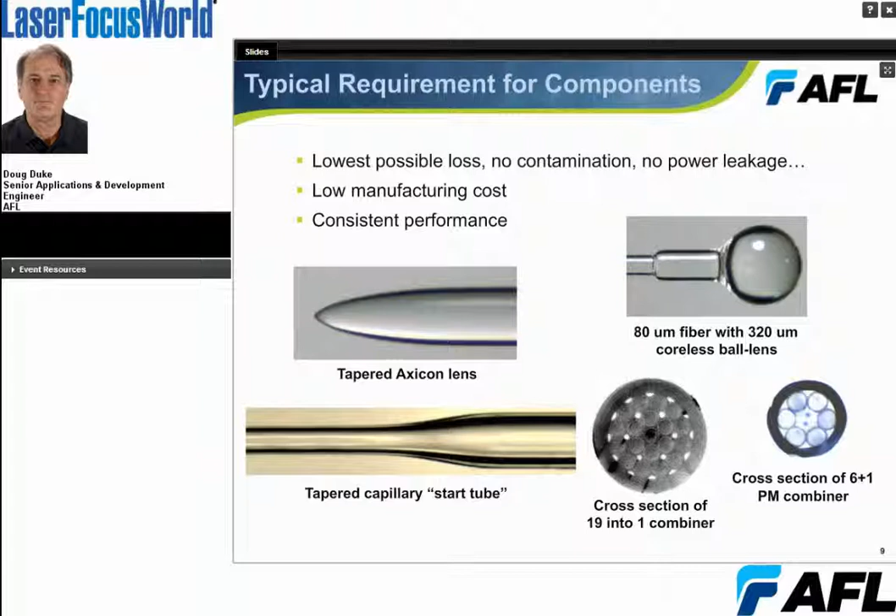So you can see a cross section of a 19-into-1 combiner that would combine the outputs from 19 individual pump lasers. And then there's also a cross section of a 6+1 pump combiner where there's a polarization maintaining fiber in the center and 6 fibers from individual pump lasers surrounding that. So these are some of the typical things that have to be created and put together to create a fiber laser.

One of the things about the active fiber is it's almost always going to be what's referred to as a double clad. So there's an inner core, which becomes the lasing cavity. That's surrounded by an inner cladding where the pump power is initially dumped. And then there's an outer cladding, which in the case of the fiber we see here is a low-index polymer, and so that low-index polymer helps contain the pump power within that cladding.

One of the critical things about splicing this fiber is that you want to do as little damage to the inner cladding as possible. You want a very smooth, debris-free surface, because if there are any crack sites, debris, or contamination on the fiber surface, after splicing this fiber, those damaged sites on the surface of the cladding will be sites where the pump power can escape. And in a worst-case scenario, after we recoat with the low-index polymer, it could literally catch on fire if you have enough pump power escaping. So it's very important to splice with very, very good quality to have a very smooth surface that's contamination-free.

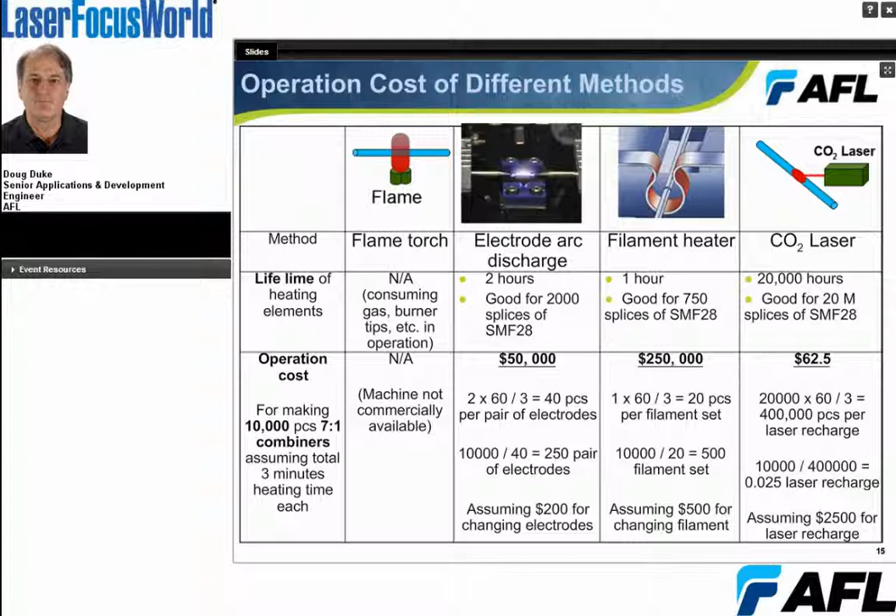So those are kind of the trade-offs. Let's talk a little bit more in detail about a filament. So here you can see a diagram or a picture of a filament. You can see the fiber going through it. So again, it's a resistive element. So like a filament in a light bulb, it needs an inert gas environment to protect the filament from ablation. There will be some ablation of the filament over time in any case.

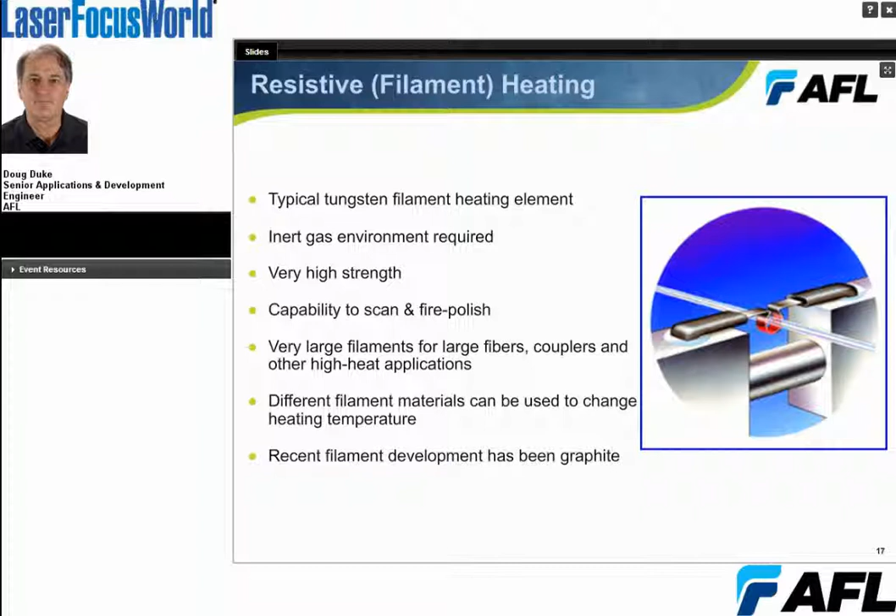It can be scaled for larger fibers by changing the shape or size of the filament, and you can change materials as well to change heating characteristics. So it can be versatile and adaptable. One of the things about the resistive element or a filament is that the heating element surrounds the fiber, and that means that you have to do the alignment using your camera or other means. You can observe at one point, but then you have to move it over to where the filament is to heat it.

So if we talk about some of the advantages of the filament, it's scalable, adaptable, capable of high strength, and during its useful life, filament is relatively stable, and you can maintain your process control fairly well.

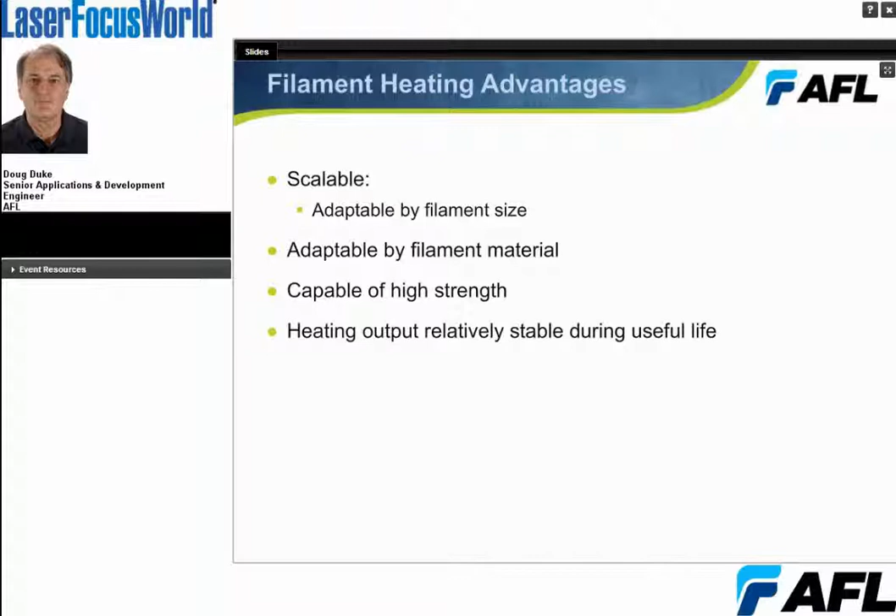Some of the downsides are the fact that you do have to change the filament based on application, and if you're doing tapering, especially of a capillary tube, the filament shape is such to heat the capillary tube evenly all the way around, you have to feed it through the side of the filament. That makes loading the capillary tube difficult. Filament replacement also requires alignment, and that can be tedious and time-consuming. So you've got a life-limited filament, relatively high replacement cost compared to electrodes, and a little bit more work to replace the filament than you do with electrodes.

Filaments are a little bit unforgiving. If you apply too much power and overheat and stress the filament, you pretty much have to replace it. You need to keep it within the acceptable process limits for the type of filament you're using. The inert gas is critical, and you typically have to have it very close to the filament location. It can't be remote, so it has to move with the machine. The operator has to be careful when loading and unloading a fiber because the opening at the top of the filament is relatively narrow, and if you touch the fiber against the filament, you could damage it.

And as we mentioned before, it's not really compatible with imaging at the point where you're heating the fiber, so you can't use warm imaging. Also, as we mentioned before, there are issues with the filament ablation and deposits on the glass surface. So this has been a problem for some of the users who are using this system for assembling fiber lasers.

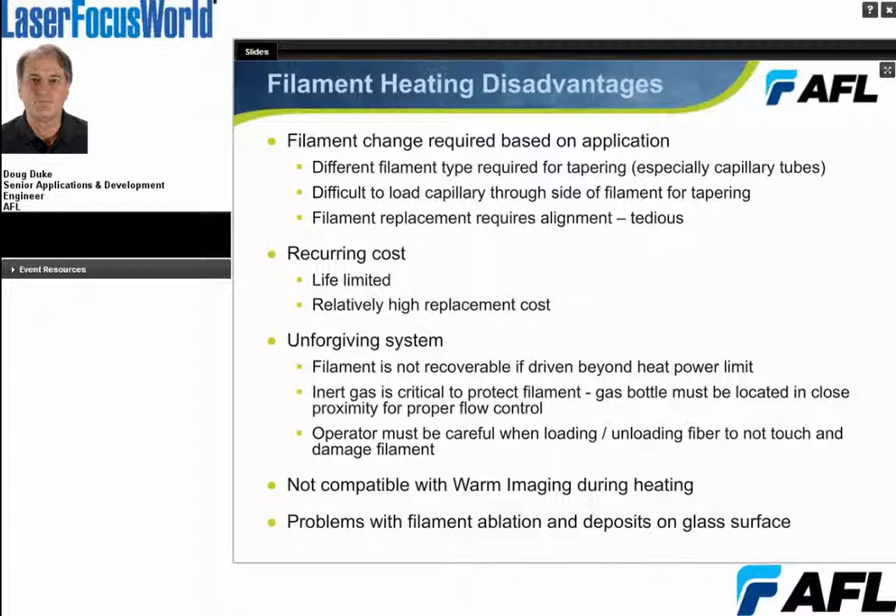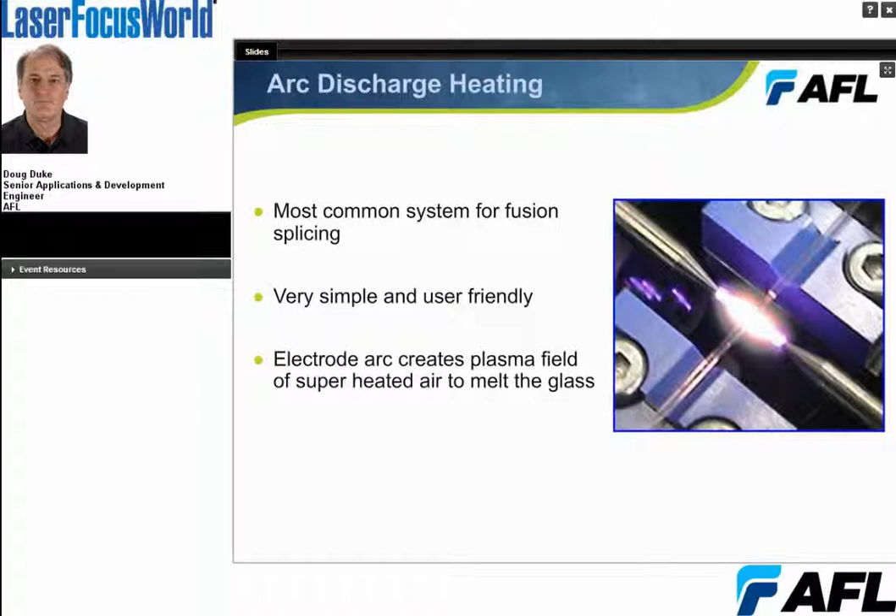Arc discharge systems, very, very common, very simple, easy to use. Essentially, the two electrodes create a plasma field of superheated air, and that's what melts the glass. It can also be scaled somewhat similar to filaments, but in order to scale it for a larger fiber, you need to increase the size of the plasma field, and we can do that by increasing the gap between the tips of the electrodes.

One thing that should be borne in mind about an electric arc system is that the path between the anode and the cathode doesn't go directly through the fiber. It's going to go either over or below the fiber. So as you can see in the photograph here, you're going to get some differential heating with this method. Now, for smaller fiber diameters, that's meaningless, but when you get up above about 500 microns, the differential heating, where you're heating the fibers more on the top than at the bottom, can become a problem. We'll talk more about that later.

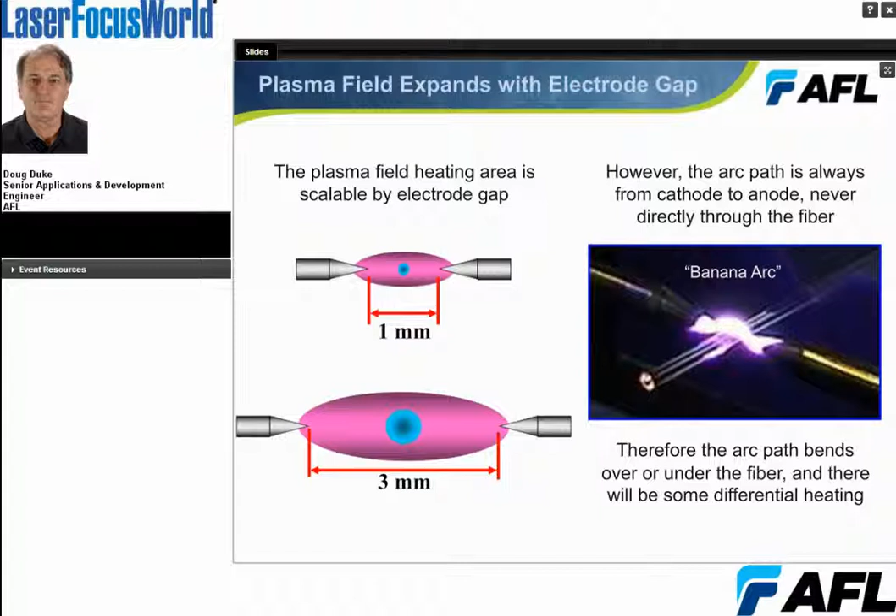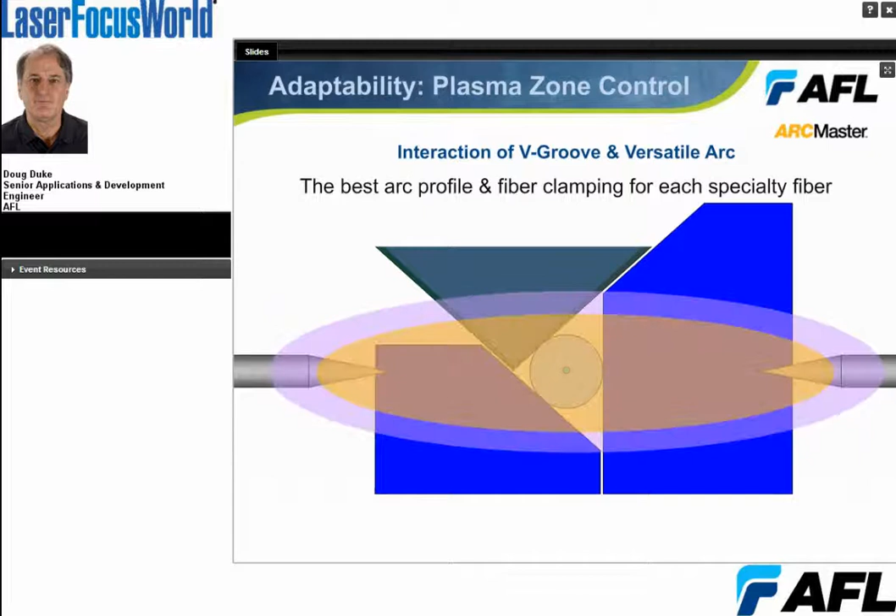As we mentioned before, it's very adaptable. So, for example, if we're splicing an 80-micron fiber, we might offset the fiber vertically from the axis of the electrode so that we're in a relatively cool area of the plasma field. Whereas for a normal fiber, we might line the electrodes up with the axis of the fiber so it's in the center and the hottest part of the heating zone. And then when we get to a larger diameter, we might increase the gap between the electrodes so we've got a wider plasma field that more effectively heats a large diameter fiber. So again, it can be an adaptable system.

One of the problems, or one of the things that's just in the nature of electrodes, is that there will be deposits of vaporized silica from the glass fiber that build up on the tips of the electrodes. This is not something you can avoid.

In fact, initially, when you put a new pair of electrodes in, you want to do kind of a burn-in on the electrodes so that you build up an initial deposit of silica so that the electrode heat output will be stable. So you go through a stabilization before you start doing anything critical. The silica deposits become less stable after about 500 arcs in the case of normal splicing. But the deposition of the silica becomes much, much worse when we use higher power and larger fiber diameters.

One of the other considerations is conducting heat away from the tip of the electrode. So as we go to larger diameter fibers, we go to larger diameter electrodes that can more efficiently conduct the heat away, and we might also use heat sinks to pull the heat off of the electrode itself.

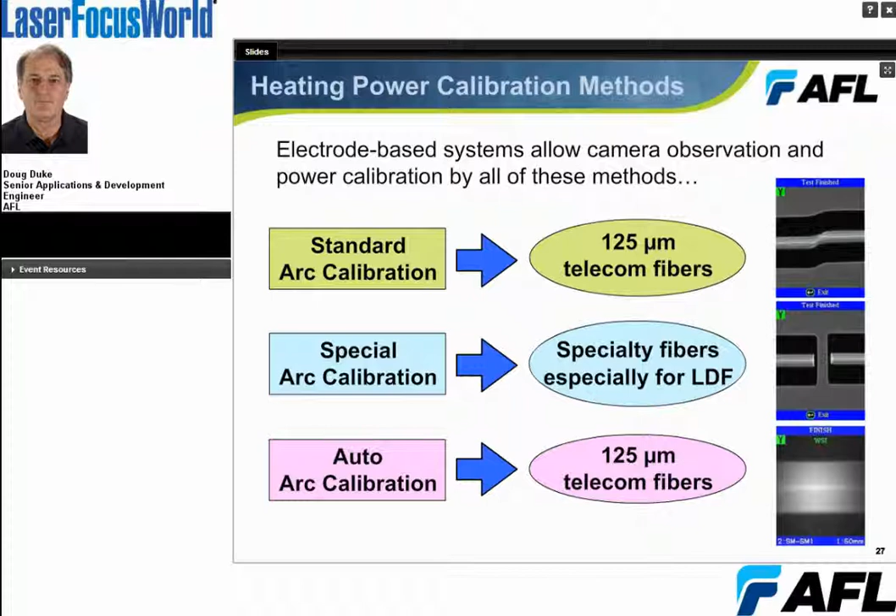So one of the good things about an electrode system is it's compatible with all these methods of maintaining the proper heat output. So some of the advantages: robust, forgiving for production, well-proven, reliable, easy to use, user-friendly, adaptable, compatible with methods of calibration. The electrodes are inexpensive and they're very easy to replace.

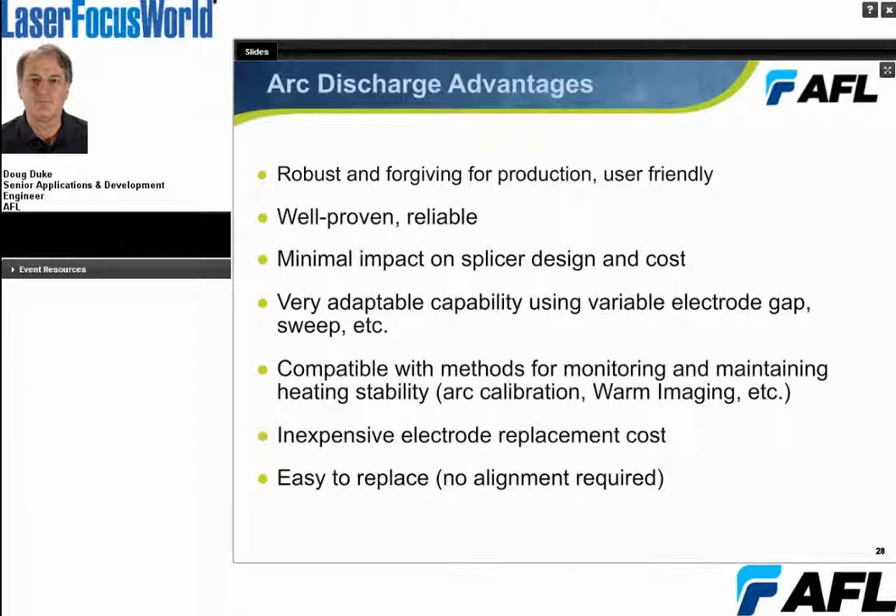But some disadvantages are the electrode. If you change the gap between the electrodes, you need to recalibrate. The electrode life depends on the application. Silica deposits become more severe as we go to higher power and larger diameters, and you will get some deposits on the fiber that will cause some damage or contamination to the fiber surface, although typically not as severe as what you might encounter with a filament system.

There is some instability splice by splice due to the fact that the silica deposits change a little bit, so routine calibration is recommended. And you do have differential heating top to bottom because the plasma field is either curving over or under the fiber.

Multi-electrode systems have also been used. Here you can see some schematics of some different systems. AFL has done quite a bit of testing with multiple electrode systems. Here you can see a 4-electrode and a 3-electrode system. These are all in the same plane, which means that the plasma field is expanded in one plane only. So this is a way of overcoming the problem of the banana arc that's going to differentially heat the fiber top to bottom. So that can be useful.

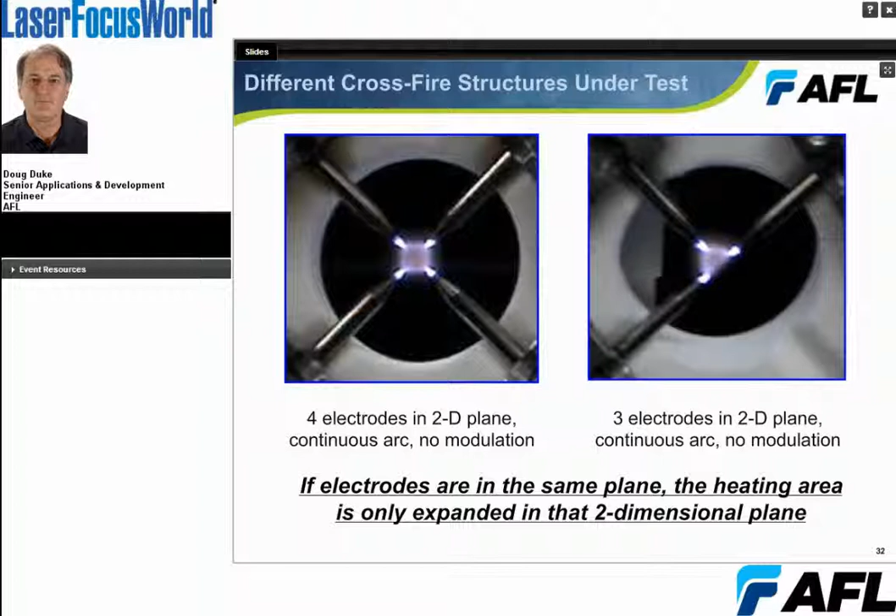If the electrodes are coplanar, again, we are expanding the heating area in the plane of the electrodes relative to the 2-electrode system. So that allows us to splice larger fibers, to in fact taper or splice fibers of 2 millimeters or more, which you really can't do with a 2-electrode system.

So the multi-electrode system has some advantages over dual electrodes in terms of allowing us to get to larger diameters and being better for tapering and more uniform heating. And it shares some of the user-friendliness of electrode systems in general.

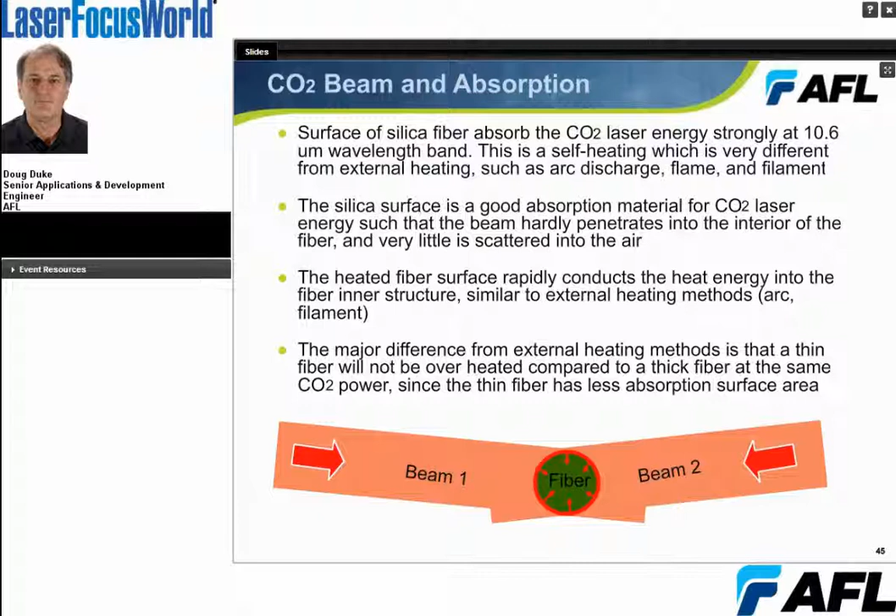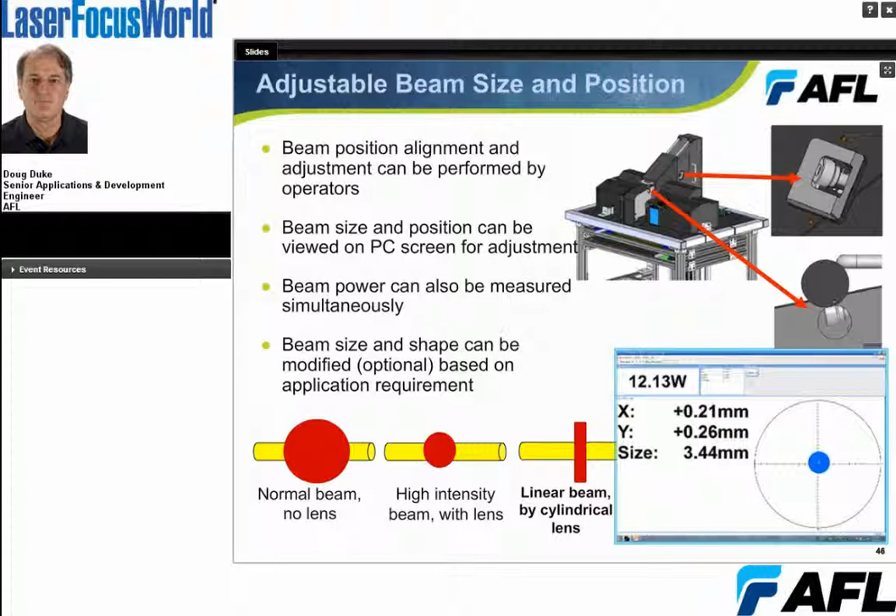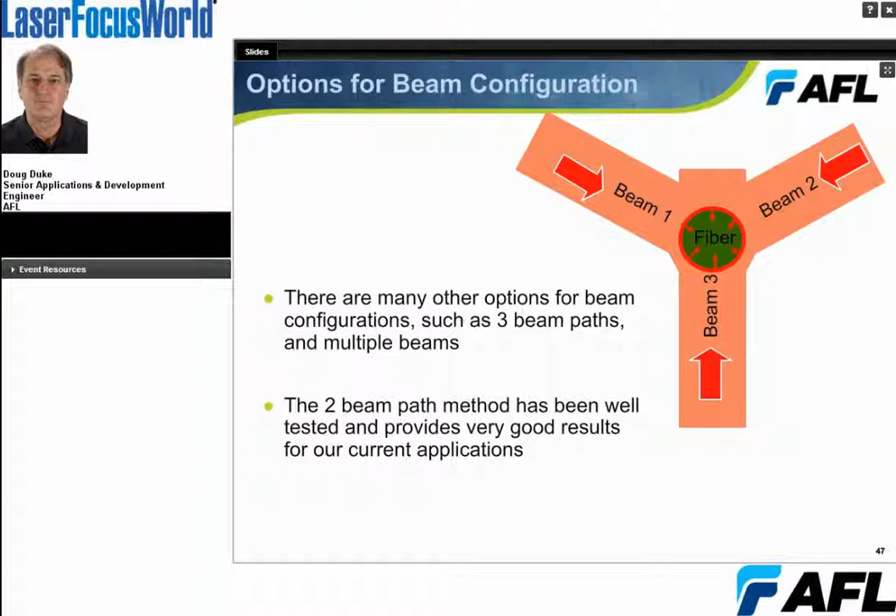Now, we can control the size and the position of the heating area by changing the shape of the beam with lens elements. So we can have a normal Gaussian beam. We can intensify it with a focusing element. We can use a cylindrical lens to make more of a linear heating area. There's various things we can do to control the shape and density of the laser beam. And we can direct the beam in from three axes if we need to. We're actually testing a system like this in our engineering group as we speak. So we believe there's some significant advantage for high-powered fiber lasers for using the CO2 laser.

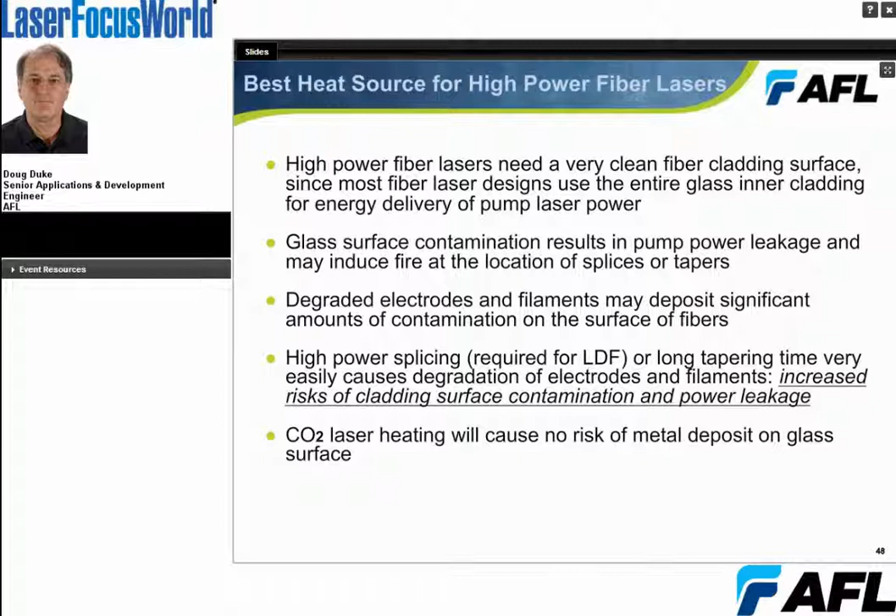Again, as I mentioned before, one of the issues with these double-clad fibers is to make sure that we have a very smooth, debris-free surface of the cladding, and with the CO2 laser, we don't have any source of contamination from the heating source. So we're really limiting the deposition on the fiber surface very significantly. And that also plays out in terms of a benefit in terms of fiber strength. If we're not contaminating or getting debris on the fiber surface, then we don't have crack sites that weaken the fiber to as great a degree.

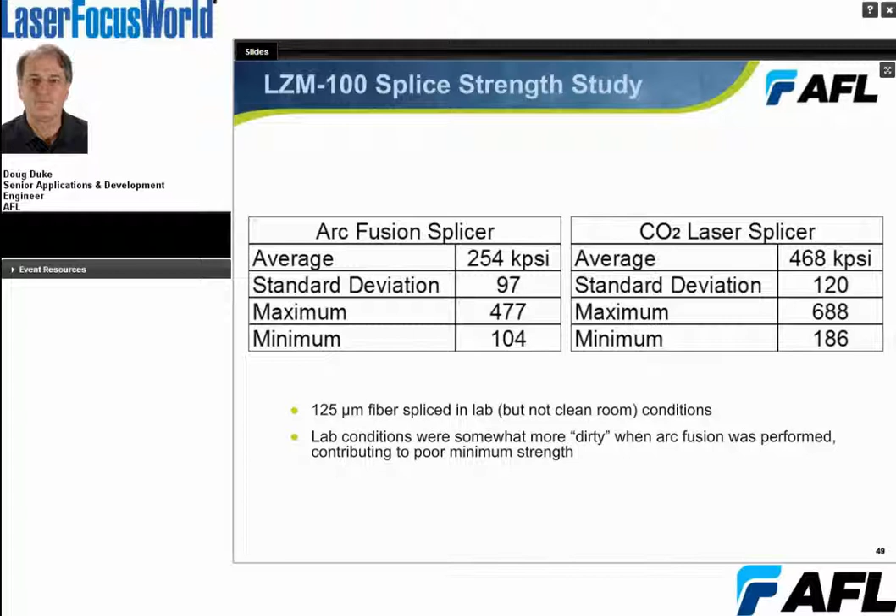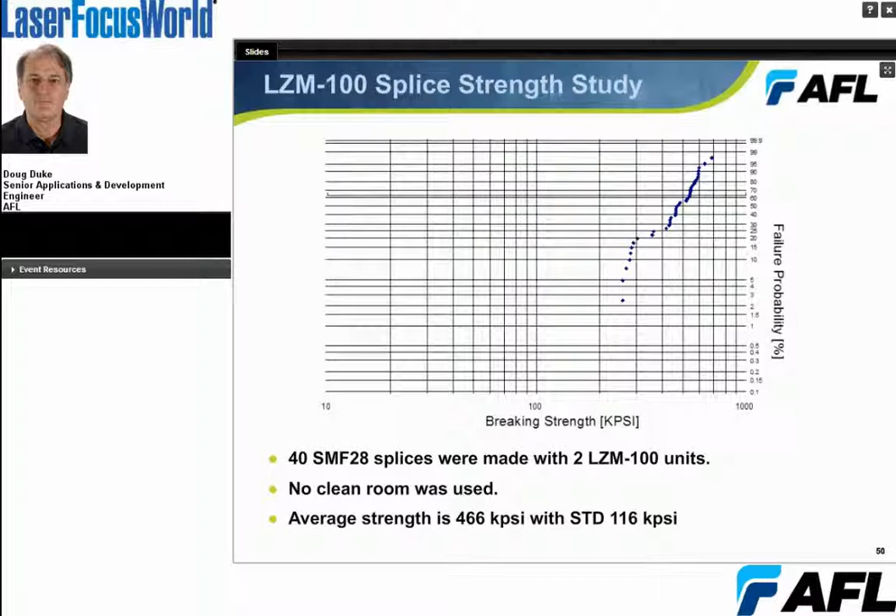So here you can see, comparing the CO2 laser splicer to an arc fusion splicer, significant benefits in terms of the strength. So there are analogous benefits in terms of being able to contain a lot of pump power for a high-energy fiber laser. This is just similar data plotted in the form of a Weibull plot. All of this data that we've shown is just normal laboratory data. It wasn't conducted in a clean room. We could get much better results if we used a laminar flow bench or a clean room.

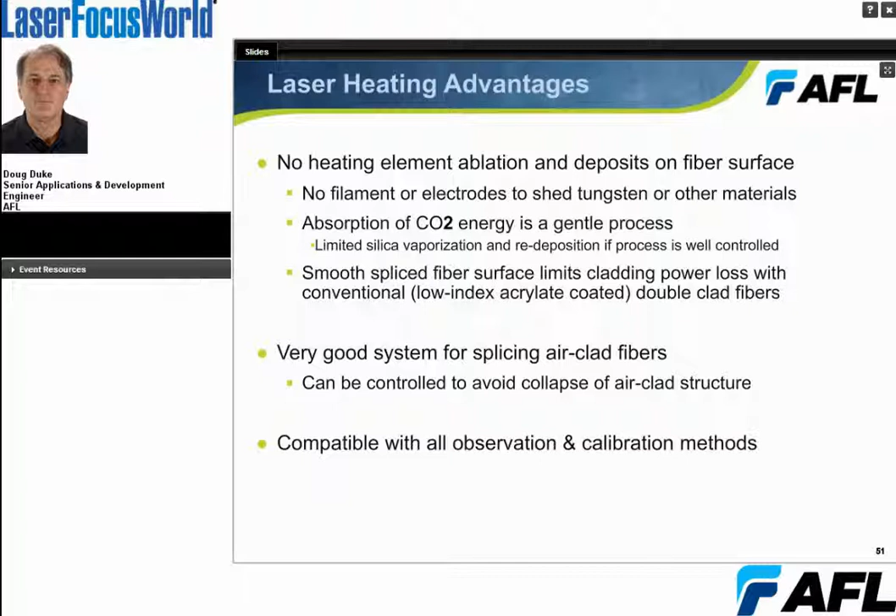So some of the advantages of the laser: there's no heating element to have ablation or cause deposits on the fiber surface. The CO2 absorption is a relatively gentle process, so if we control and use just the right amount of heating, we're also limiting the amount of vaporization of the silica itself and the redeposition of silica onto the adjacent areas of the fiber. So we're going to limit our cladding power loss in terms of fiber laser applications. It also turns out that this method of heating is very good for air-clad fibers. We can control it very well so that we avoid the collapse of the air-clad structure. And the laser system is compatible with all observation and calibration methods.

Disadvantages, probably the biggest one is, well, let me finish up with the advantages. Essentially, we have almost no recurring consumable costs. The laser itself will typically have a life of about 20,000 hours, at which point you send the laser in and get it recharged, and then you can use it again. So every couple of years you might have to do that, perhaps every 5 years. So you've really got reduced maintenance downtime. There's no need to replace electrodes or filaments, no need to recalibrate after replacing the filament or electrodes, no need to align the filaments or stabilize new electrodes.

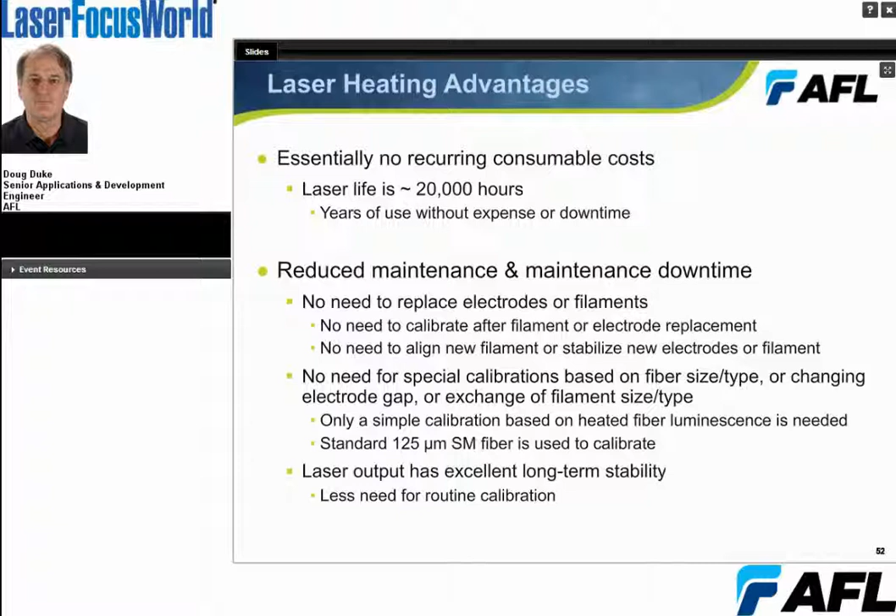There's no need for calibrations based on changing the size of the fiber or changing electrode gap or changing filament type. All of those things are avoided. And the laser output itself has excellent long-term stability. So there's just, in general, less maintenance and calibration downtime.

There are some disadvantages. The initial cost of a laser is quite a bit more expensive than other heating systems, including the beam delivery optics. There are safety issues to be addressed, so you have to take care of that. It's large and bulky, so there's service and support issues that have to be considered. And there's also a short-term power instability that has to be addressed, and we'll discuss these details.

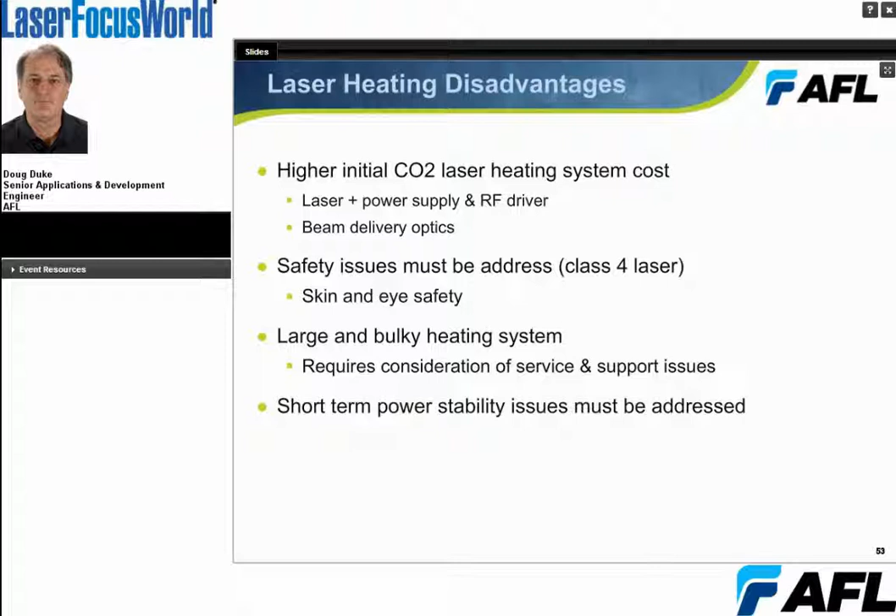So let's talk about the power instability. A CO2 laser typically has a power fluctuation of about plus or minus 5%. When you initially turn the laser on, the fluctuation is very rapid, and then it continues to fluctuate at a slower pace as the lasing cavity warms up. But this power fluctuation is due to the expansion and contraction of the lasing cavity and resultant mode hopping.

So how do we do that? Well, we use two feedback methods. One is that we can split off with a beam sampler a small amount of the output power of the laser and monitor that directly and use that for feedback. And so that's quite useful. But the other thing we can do is we know that the brightness of the fiber depends on the energy being absorbed by the fiber, so we can use the luminescence of the fiber as detected by the observation system, the camera of the glass processing and splicing machine, as a feedback method.

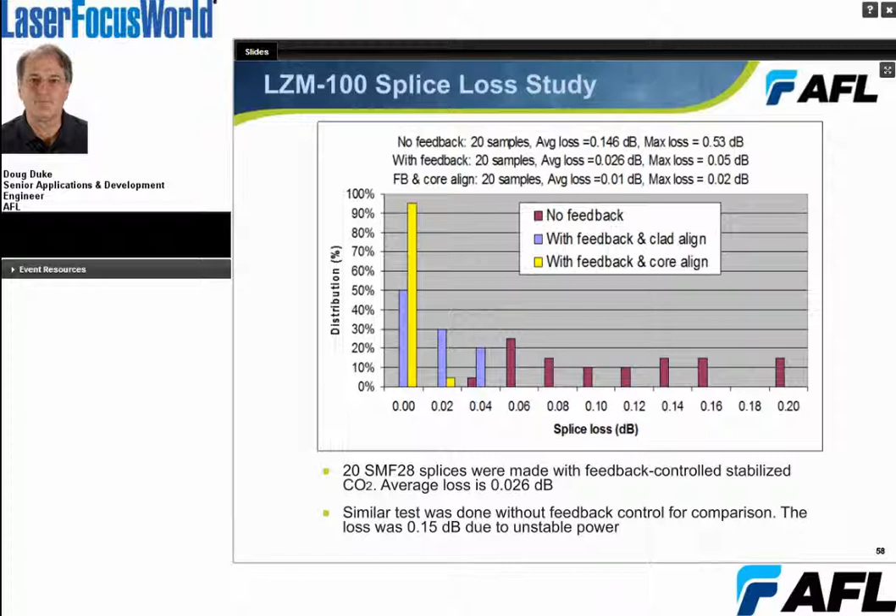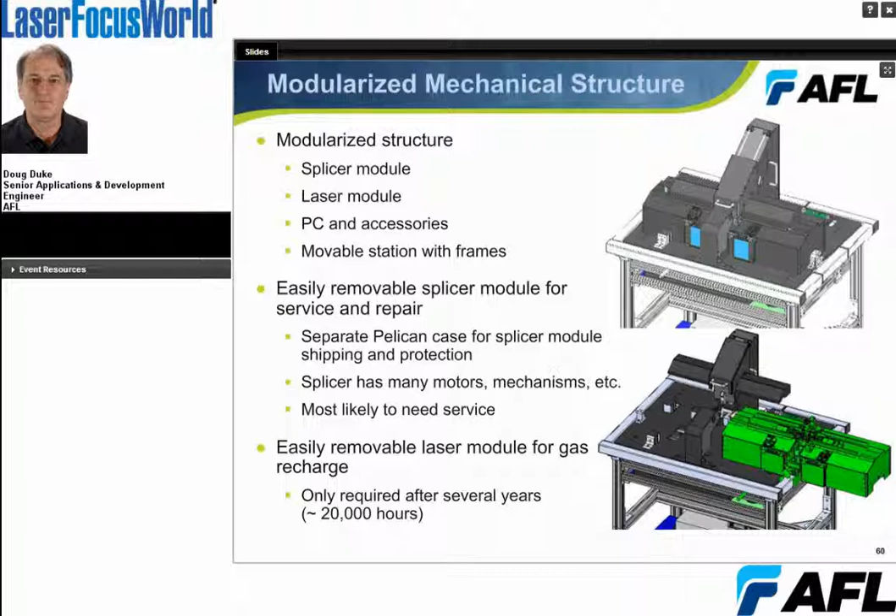So these are the kinds of considerations you need to be thinking about if you're going to design a laser-based glass processing system, because overall it's quite bulky, and you don't want to have to put the whole thing in a crate and send it in for service. The other thing is safety. The CO2 laser itself is a Class 4 device, which means that it is hazardous in terms of both skin exposure and eye exposure. So you need to enclose the working area and use safety lockout switches to make sure that during operation the operator is not exposed to any of the laser energy. So that has to be a design consideration for a laser-based system.

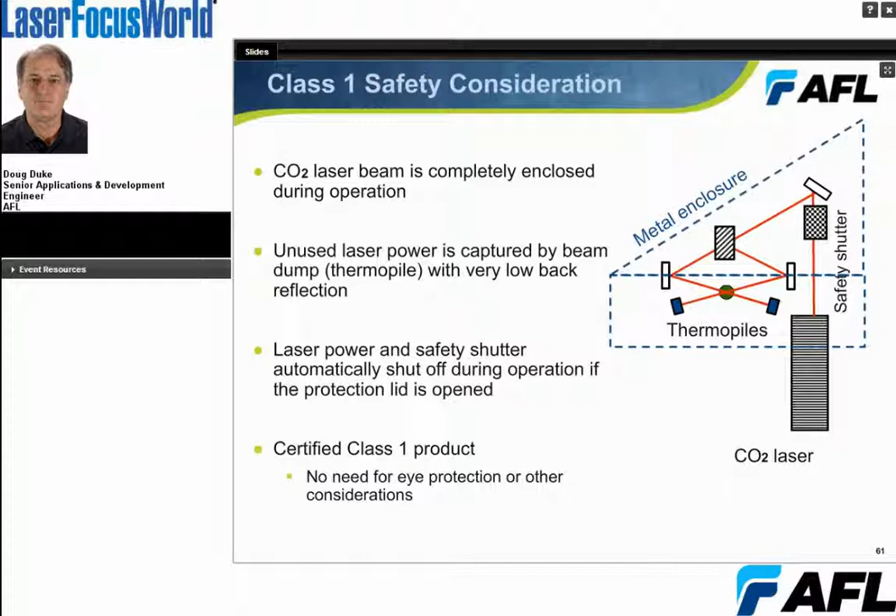So let's move on to the actual processes and devices that we need to make for fiber lasing. There's splicing, tapering, and lensing, and inputs and outputs that we have to do for a fiber laser. Splicing considerations, I think we can summarize it by: we really need a lot of versatility. There's different fiber diameters we have to deal with. Sometimes we have to splice a large fiber to a small fiber, a bundle of fibers to a single fiber, etc.

And there may be various alignment techniques that are needed: manual alignment, PC control, lateral, side view alignment, or end view.

And what's important here is to get a good weld, but at the same time a relatively abrupt transition of the diameter, because that allows the best coupling of the energy from the 7 fibers in the combiner into the multi-mode fiber. So that's what we're going to see in this video.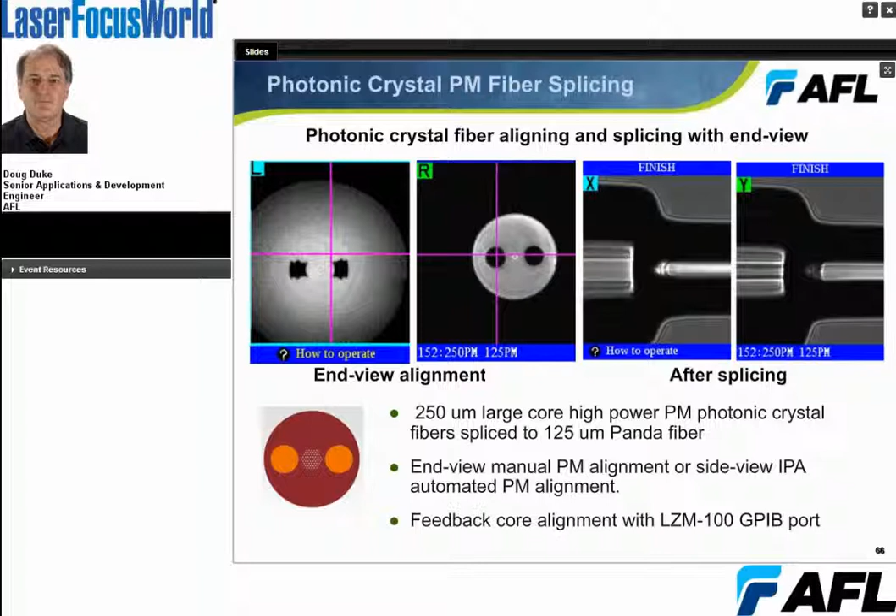Tapering is very important for fiber laser construction. So there are two principal areas where tapers are used. One is the pump combiner, where we take multiple fibers and pull them into a single output. And the other is near the output end of the fiber laser, where we might use a tapered mode field adapter to take the lasing energy from a large diameter fiber and couple it with low loss into a smaller diameter output fiber.

So there are many things to be considered for tapering. One is the maximum taper length. Another is what is the taper ratio, in other words, the ratio of the starting diameter to the minimum diameter that you need to achieve.

A load cell can be useful for tapering because that allows you to understand the status of the glass. Is it semi-molten? Is it going into liquid phase, which would mean that you've overheated it and you won't get a well-controlled taper? We can use a warm image to look at the luminescence of the fiber during tapering and monitor what we're doing with the power.

And there are various considerations for how we control the motors during tapering. So we might use what we call an auto-pulling mode, where the feed speed is set by the user and is constant, and typically we feed in from the right-hand side and we pull on the left-hand side.

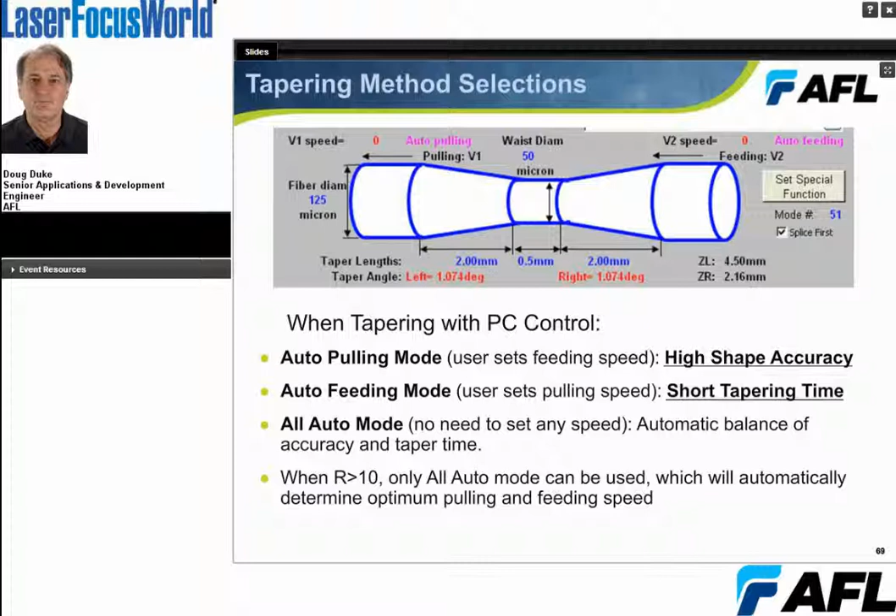So again, this is just showing a little more detail about the relative motor speeds, and the graphical user interface allows you to just input the dimensions of the taper profile that you want to achieve, and then the calculations are done behind the scene in order to achieve the proper profile.

You might want to perform a linear taper, in which case the transition from the conical taper area to the uniform diameter area is abrupt, or perhaps sinusoidal, where we've got a little bit of a curvature in the transition. So all of these things can kind of be programmed in to the tapering profile.

As we mentioned before, one of the critical aspects of tapering for a fiber laser is to make a combiner. So first we have to taper a capillary tube. And tapering a capillary tube, it's very important to apply the heat evenly such that when we taper the capillary tube, we achieve a truly round shape. And then we get good packing when we load the fibers into the tube. We put it back into the glass processing machine and taper the multi-fiber combiner down in the secondary operation.

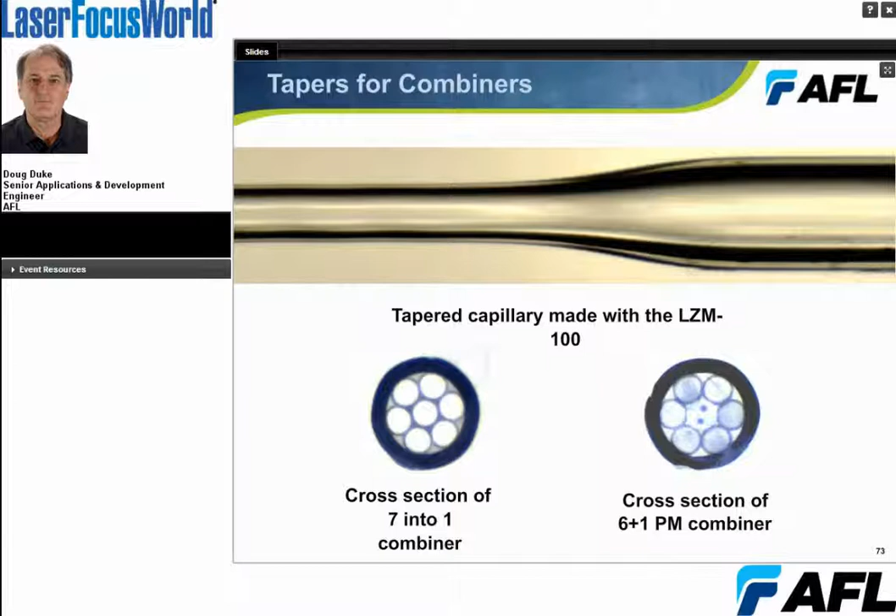One of the other applications for tapering is a mode field adapter. A mode field adapter typically is created by the combination of two things. One is tapering a large diameter fiber down to a smaller diameter fiber. For example, tapering a 250 or a 400 micron diameter fiber down to 125 micron. And then we splice it to a 125 micron fiber that has been pre-treated.

And the 125 micron fiber has gone through a process that we call TEC, thermally expanded core. And basically, this is a well-controlled heating of that fiber in order to cause diffusion of the core and thermal expansion of the mode field diameter.

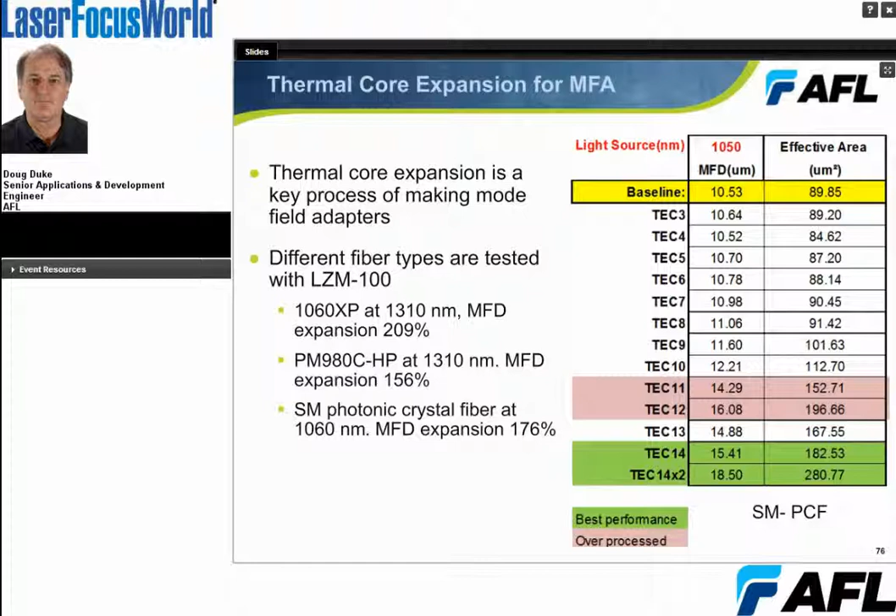For a ball lens, the simplest way to generate a ball lens is to take a cleaved fiber and gradually feed it into a heating area such that surface tension of the molten glass pulls it into a ball shape.

We might want to have a pure silica ball lens on the output of a single mode fiber. In that case, we might first perform a splice, then move the fiber over and heat again, pull some of the coreless fiber off, and then feed it back into the heating area so that we end up with a coreless ball lens on the end of a single mode fiber. And you can see that in the bottom sequence of drawings on this slide.

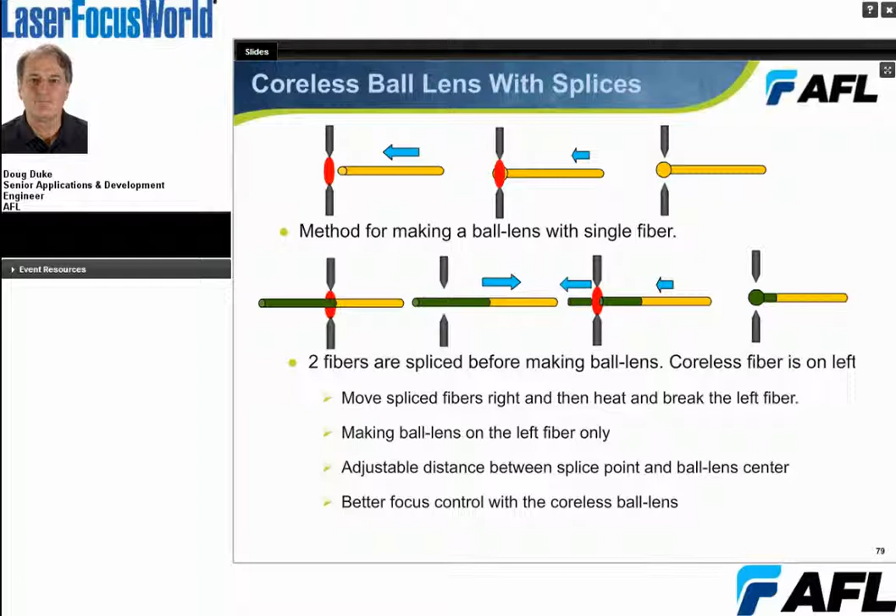I'm going to show first a generation of just a 1200 micron ball lens with a 400 micron starting fiber. So you'll see the fiber feed in from the right into the heating area, and gradually the ball lens becomes larger and larger. And we're actually rotating the fiber as we do this so that we can minimize any droop.

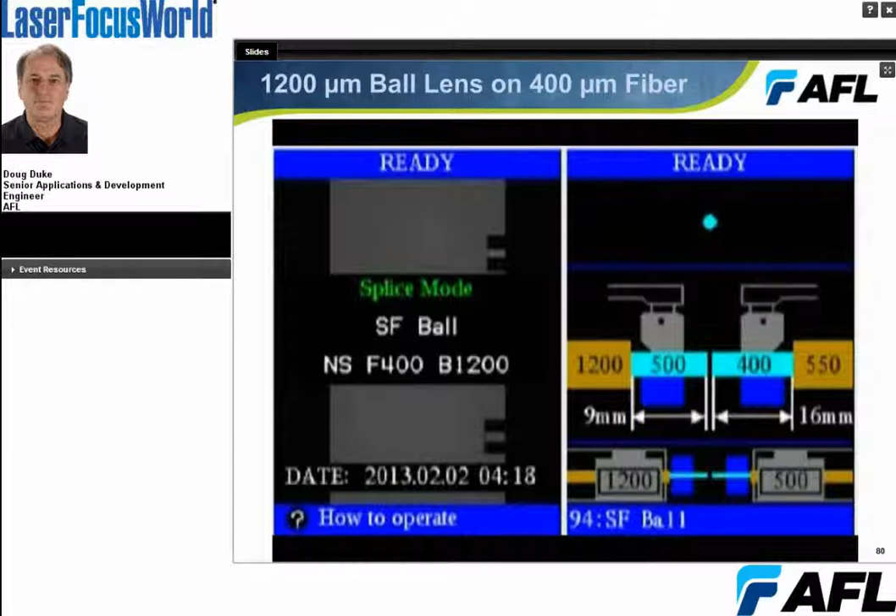I was going to show a splice and secondary ball lens video as well. In the interest of time, I'm going to skip that one, and we'll move on to a few other slides here. One of the other types of lenses that can be generated is an Axicon lens.

What you see in the polished sample is essentially a conical tip created on the end of a fiber. If we want to do that with a heating process, we end up with a different tip shape, as you see on the right, but the beam characteristics can be the same. And again, these Axicon lenses can be used for coupling to a diode laser, such as a pump laser.

So in order to do this, we use a somewhat different process. First, we splice two fibers together. Then we taper them until we get to a very small diameter. At that point, we pull the two fibers apart.

And what you'll see in the video is a ball lens will be generated with the left-hand side fiber, and we will use that as a radiating heat element to control the tapered Axicon lens that's formed on the right side fiber, because controlling that tip shape is very important.

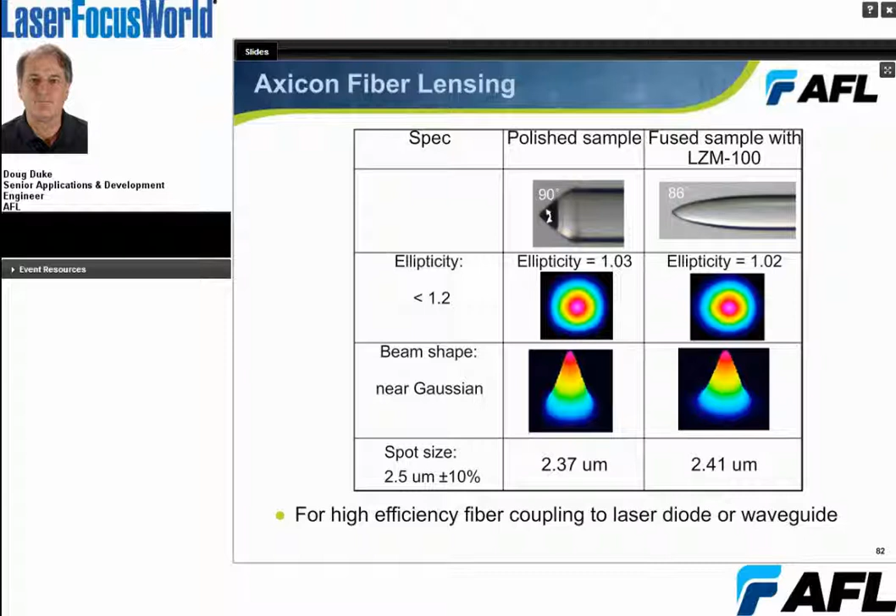Okay, sorry for the delay.

One of the last things we'll talk about is making end caps for the output of the fiber. Most commonly, an end cap is just a lens element that is spliced on, and it might be significantly larger than the diameter of the output fiber. We'll see a video here of a 2 millimeter fiber spliced to a 125 micron fiber.

And what is notable is that since we're using a CO2 laser to do the splicing, the fact that we're heating through absorption means that it's relatively easy to perform this. If we used most heating methods, the amount of heat applied for 2 millimeter would be far too much for the 125 micron fiber, and the 125 micron fiber would be vaporized.

But in this case, because the surface area of the 125 micron fiber is significantly smaller than the 2 millimeter fiber, the lasing power that is appropriate for both 2 millimeter and 125 is almost the same. So we're able to perform this splice with very good quality.

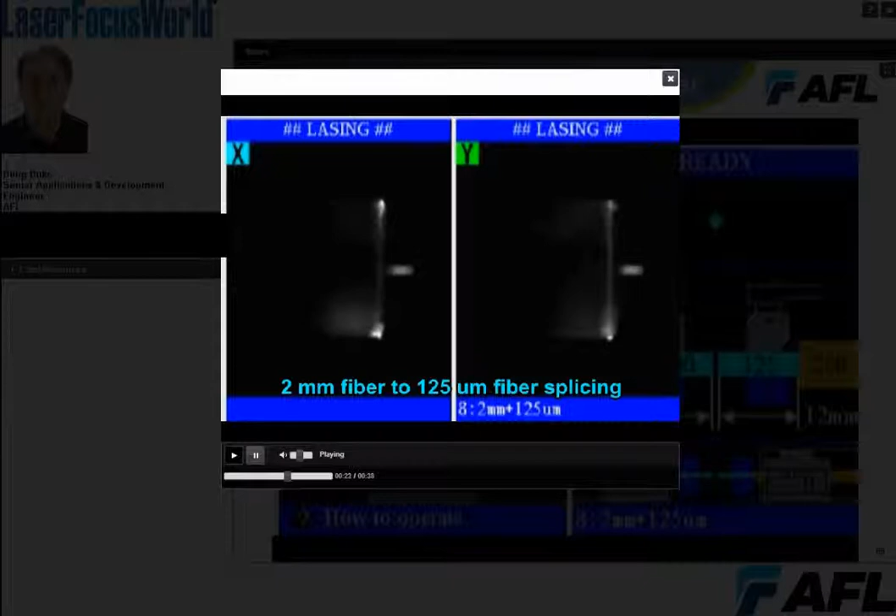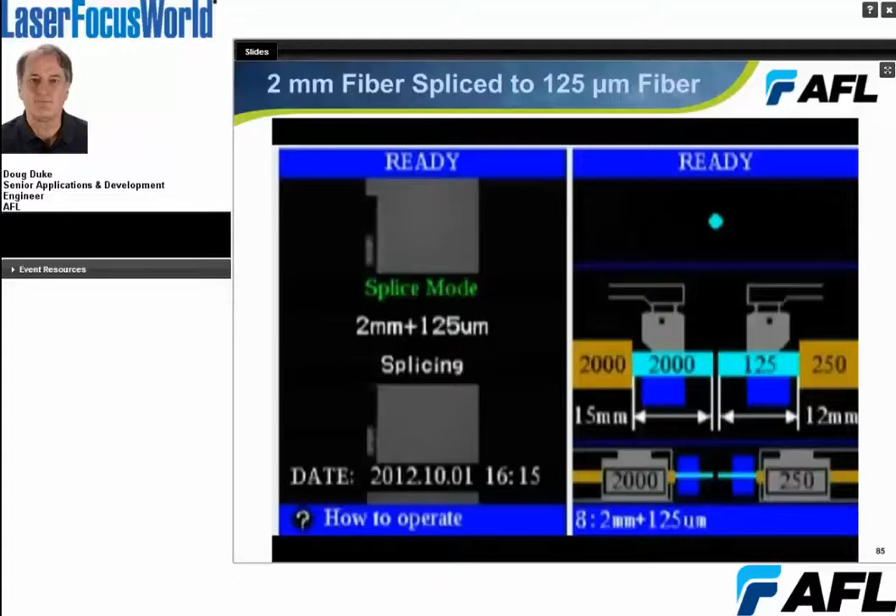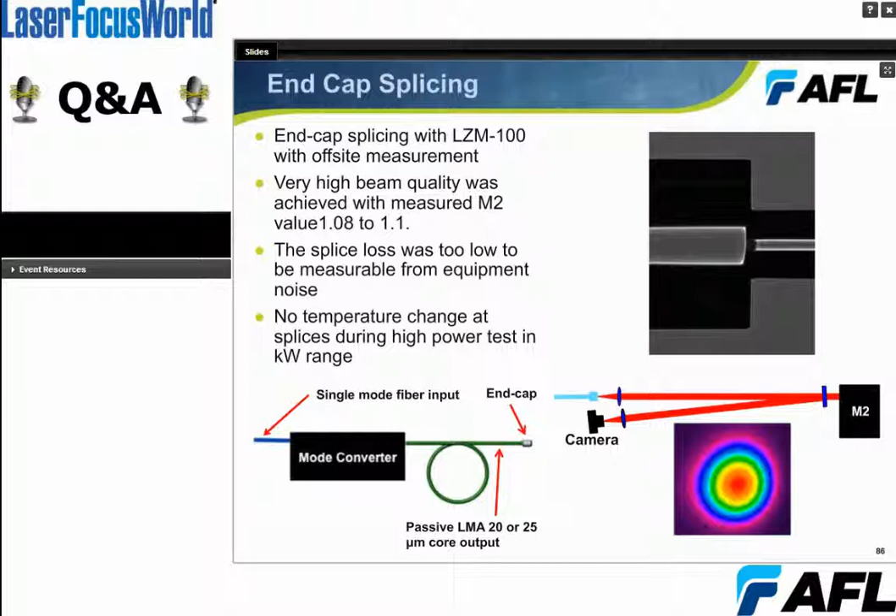I have to say those videos were amazing. I had no idea you could splice a 2 millimeter fiber to a 125 micron fiber. Anyway, the first question: is the 3-electrode system an AFL solution?

We've experimented with 3-electrode and 4-electrode and even more electrodes than that. We do not offer a 3-electrode system. When we decided to develop our new glass processing machine, we had to make a choice. We finally narrowed it down to a multi-electrode system or a CO2 laser system, and we thought the advantages of the laser were such that it was compelling for us, and we've stopped actively working on multi-electrode systems. Mm-hmm.

Regarding the CO2 laser heating, 10.6 microns versus 9.4 microns, which is better and why? We're currently using 10.6. We're probably going to investigate 9.3 or 9.4. That wavelength tends to be not as well commercialized at this point.